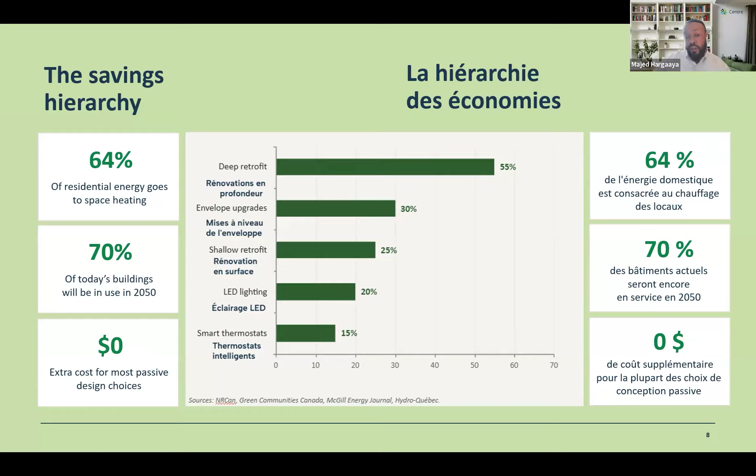And $0. Passive design choices, as I spoke of earlier, made at the design stage, the beginning. Strategies like orientation, shading, window placement, thermal mass considerations. These cost essentially nothing extra compared to building without them. The cost is in making them later or not at all. Next slide, please.

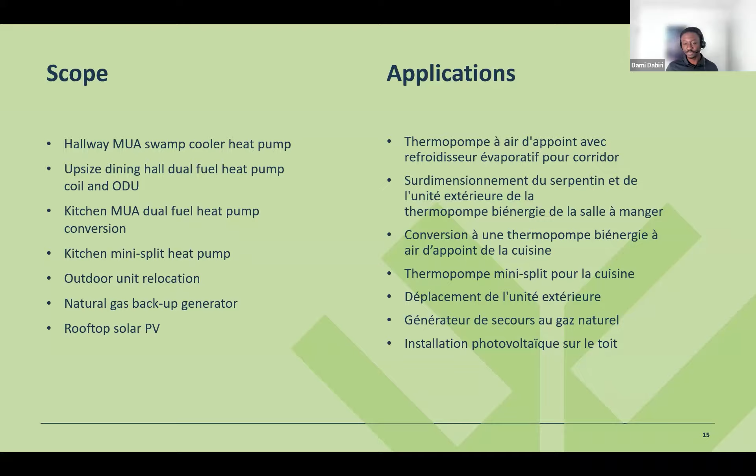And speaking about cost, there is a question in the chat about the typical cost of an energy audit and L2, the extended energy study that you mentioned. Yeah. So an L2 depends on the scope, but typically between $10,000 and $15,000. Again, if you want to go deeper on one system or on multiple systems, that number can change, but you can expect between 10 and 15. I've seen a lot of them come in at around $12,000.

Okay, so the project team, again, something I'll speak more about the importance of later. We have Melanie Cox, our contact at Salmo Valley Estates, who has been massively instrumental for this project, and I'll say more about that later on. We have NG Refrigeration, which is a mechanical contractor. EAS are doing the electrical work. Infinity Solar, as their name suggests, are the solar PV contractors.

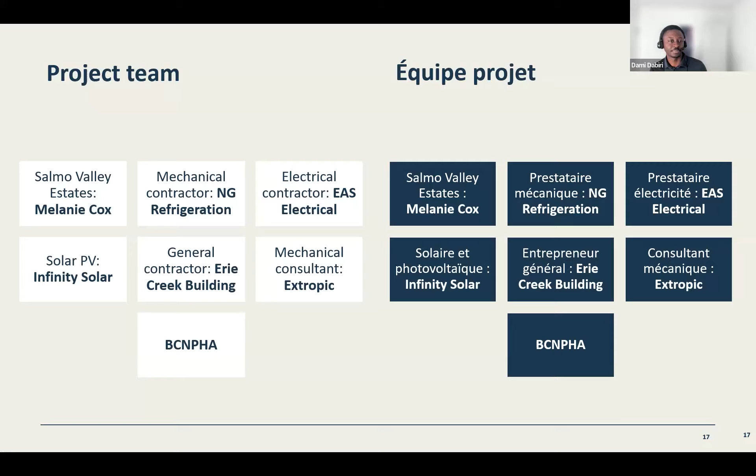If you can have someone that knows the building in that role, it's night and day, I would say. It's not always possible, but if you can, it's totally worth it. Thanks. Yeah.

So like I mentioned, construction started not too long ago in November of last year, and I would say we're about 80% through the scope. The outdoor units that were in the penthouse mechanical room have come outside, and the swamp cooler that was causing so much headache has been decommissioned. That will never leak and damage the building again. The kitchen mini split heat pump has been installed. We're still waiting for a few of the outdoor air units for the new heat pumps, and we're expecting those pretty shortly.

The permits and net metering for solar are complete. We've ordered that, and install is probably going to be completed by the end of May. And the generator has arrived; that's on the cement pad. We're waiting to attach the gas line for that, but that'll probably happen over the next couple of months. So we're looking at full completion probably by the start of the summer.

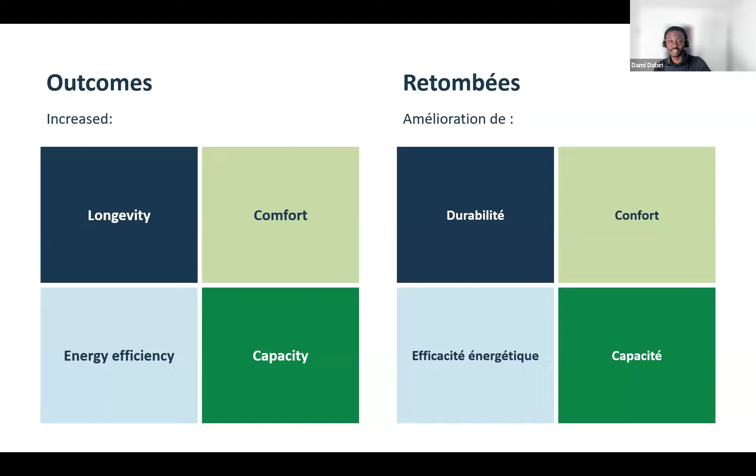Yeah, which we found here, if you have a unit that's performing poorly in terms of cooling or heating, it's very easy to say, oh, let's upsize the unit or get a different piece of equipment. But sometimes it's as simple as letting your outdoor air unit breathe. Yeah, so it's definitely something to consider, you're saying. 100%. Yeah. Okay.

Cool. Thanks for the questions, Majed. No problem. Everyone else, feel free to follow Majed's lead if you have a question. Yeah, there's a question in the chat.

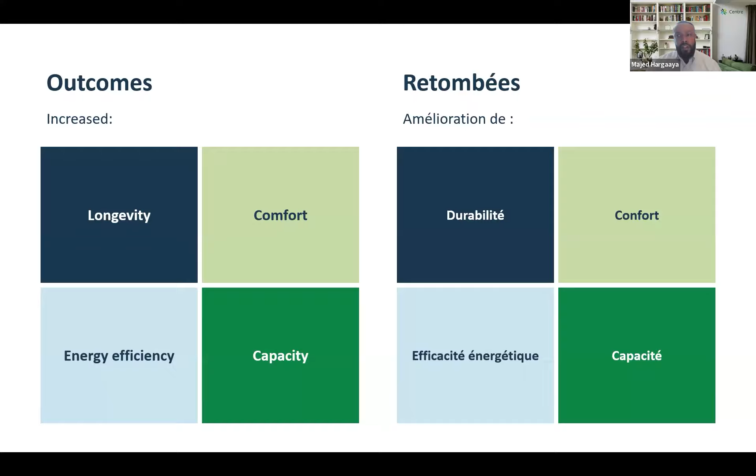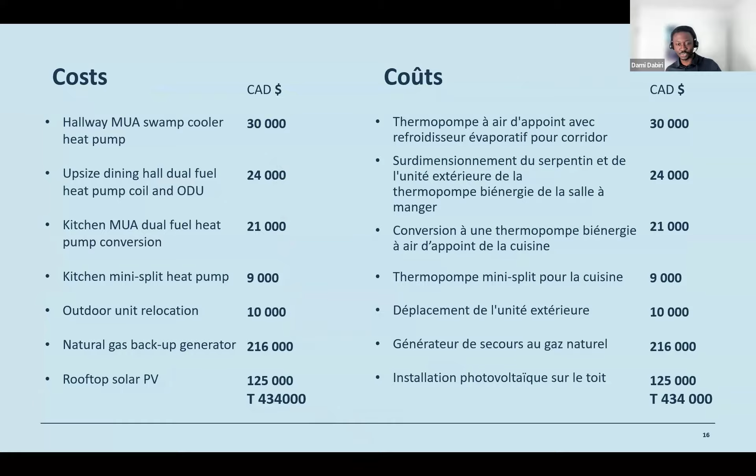And the last question was, what energy savings would be recovered per year? Yeah, that's a great question. If we can hold on to that question, that was actually the slide I was just about to get into. This one right here. So drilling into the energy efficiency outcomes a bit more, just to give you a sense of the extent of savings we're expecting and that you can expect from your projects.

For this, I'll spotlight mainly the three energy efficiency measures, because for some of the other measures we're upsizing the unit to deal with cooling issues or adding a heat pump to deal with cooling issues. In those cases, you won't see savings because you're increasing energy use. But for the addition of a dual fuel heat pump for the kitchen MUA and replacing the swamp cooler with a heat pump, you should expect to see savings.

This table here shows kind of the relative energy costs. I'm going to turn on my laser pointer again. Okay. It shows the relative energy cost and GHG savings for the three measures. If there's one plus sign, it's between 0 and 20% savings. Two plus signs is between 20 and 50% savings, and three plus signs is anything above 50% in savings.

A couple of key things to note. The solar PV measure doesn't technically save energy, which is why you see there's a dash here, because you're just shifting where that energy is coming from. It's not an efficiency measure.

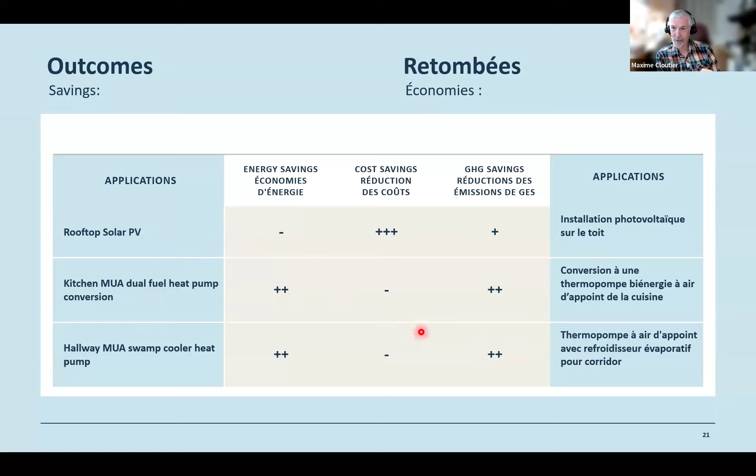I see that you've got a fairly big generator in your system. What does it feed actually? Does it feed the whole place or just some parts of it? Yeah, that's a great question. It's some parts of it. It's the common spaces, so like hallway lighting, hallway systems, the kitchen. Okay.

So what's your evaluation of how long your building is going to last? The life expectancy of your building. Yeah. So this building was built in 2014. So we're just over a decade into the life of the building. So yeah, this building is going to be here for a while yet. Would you call it 100 years or more? Yes, but you probably don't want to get to the 100-year mark without doing some significant work. I would say before you have to do anything major, structural walls will probably be at least 60 years. So maybe another 50 years from now.

I'm asking the question because the building I'm in is already 55 years old. So we all wonder whether we should aim for 100 years overall or even more, because the tendency today is to not demolish what can last. We're uncertain. Should we invest big money at the age the building is at now, about 60 years old? And should we expect a life expectancy of over 100 years? My feeling is that it could go to as long as 150 years if you're very careful. It's just a gut feeling. But again, it also depends on your specific building, like is the facade brick? When was it built? What are the bones like? The variables are many.

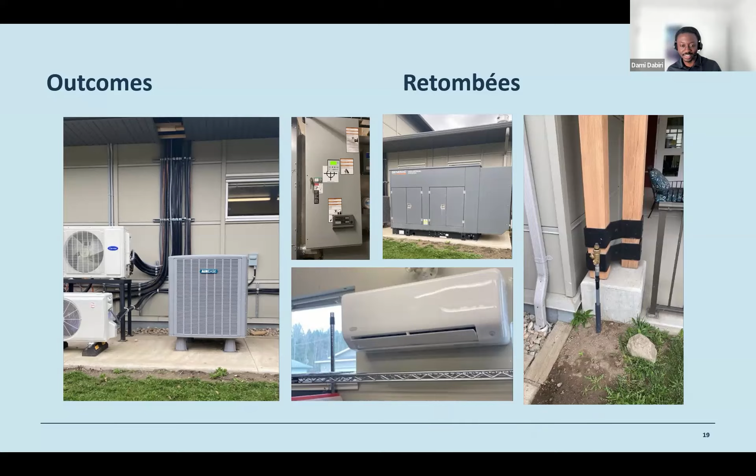Yeah. Thanks for those questions, by the way, Maxime. Does anyone else have questions about what I just said?

Yeah. I put a similar one in the chat box there. I know what we're doing and why we're doing it. I understand that, I'm not against it, but the problem is from a capital perspective, you have to go and ask for money based on the return. So I did a quick calculation there: in BC, buildings last for 25 years. Let's say equipment lasts for 15, 20 years, sometimes 20, 25 years.

So with a capital cost of $434,000 over 25 years, you have to save $1,400, ignoring upcharges and things, $1,400 a month in energy to prove to the powers that be that it makes sense to do that. That's what I was getting to with my previous question. $1,400 a month or a year? A month. With a capital cost of 434, divided by 25 is 17,000 a year, which is $1,400 a month to save to cover that capital cost.

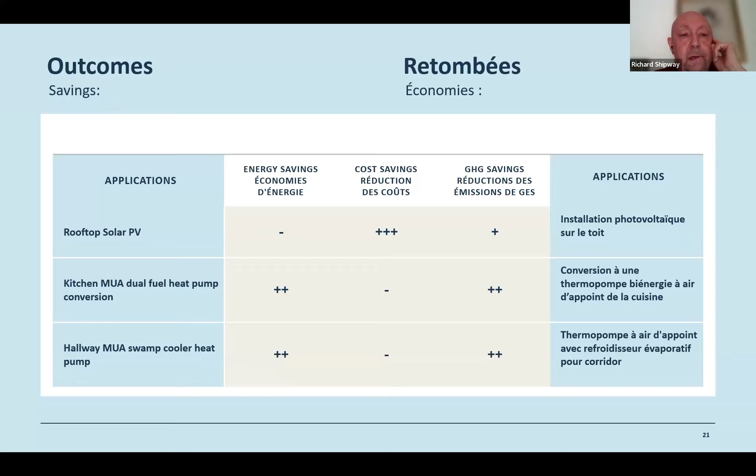So the problem that I have is when you go and look to get the capital cost covered, and BC Housing has less and less money nowadays, you have to show where that return is. And that's the challenge, right? So I think the important thing from my perspective is to have numbers to back up that we spent this, we saved this, going forwards. That's going to be really important because those are some of the questions I get asked when I try and look for cash to do this kind of work.

Sorry, I'm happy to speak to that, but for the math, if you're saving $1,400 a month, that's like $18,000 a year, which will mean you recover your project costs in 2 years. So was it a $40,000 cost or $430,000 cost? Oh, I thought you said 34,000. That's what I heard. The numbers you showed were $434,000, right? Yeah, one of the projects. I thought you were speaking specifically about the heat pump project.

One project you have is 434, so it's $1,400 a month that we have to show that we benefit from, right? So that's the argument I have to have with getting funding: if I don't save $1,400 a month, then the answer that often comes to me is, well, why bother doing it?

Yeah, correct. Just to make a clarification, that $434,000 is for the entire project package, so the rooftop solar, the heat pumps, everything. For the entire project package, there is a return on investment. You will get your money back because we're looking at an ROI of like 15% for the total. And I think I mentioned that that's mostly due to the rooftop solar. If you were to isolate these, then the equation, yeah, go ahead.

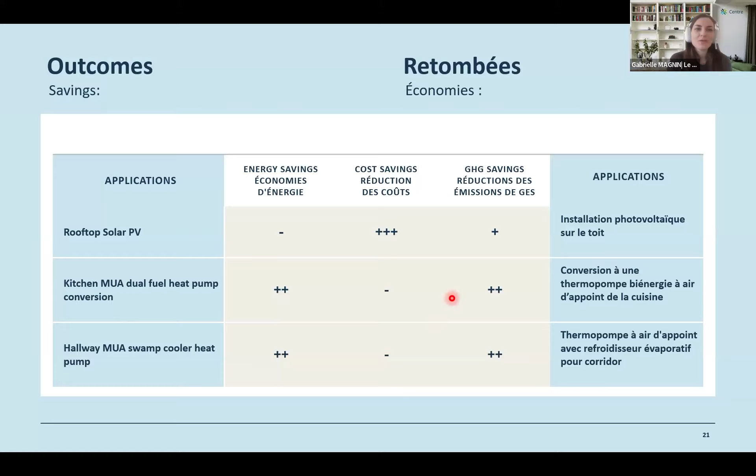Just as the timekeeper, I would suggest, thanks for all the questions, but maybe we can wrap the conversation first. So Dami, if you can talk about maybe the challenges and lessons. Yeah, thanks. And highlight also some challenges of this type of project. So that's a really interesting conversation. And then for the last few minutes, we'll talk about other questions. Sounds good. Yeah.

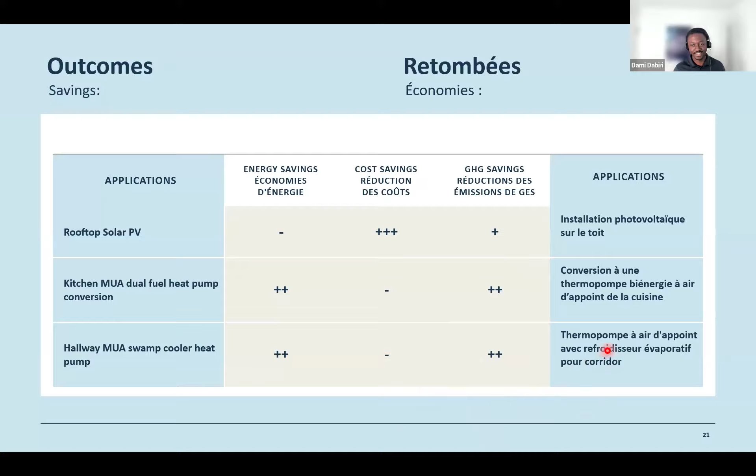Sounds good. Thanks. Okay. So for the considerations and constraints, what are some factors to consider if you're looking to do a similar project? There are a number of them, but I'll touch on some that I feel are really important. The roof structural capacity. We did a structural assessment of the roof early on to understand if the solar installation was a good idea and it matched our structural capacity. And lucky for us, the roof had the needed capacity, but it's not always the case, especially if the building is older. So definitely check this early.

And even if you're not quite ready to do a solar PV installation, that's fine. Still do that ahead of time so you have that information when you're actually ready to install your solar PV system. In our case, the solar contractor did the structural assessment, but it doesn't have to be them. You can engage with a structural engineer to do that.

Another roof-related structural issue that we ran into was upgrading the roof anchors. And thanks to the window cleaning folks that were there earlier on, they identified that the anchors were not adequate for folks to work on the roof from. And it was fairly straightforward to do, but again, also a consideration that we had to make.

For electrical upgrades, thankfully, we didn't need any capacity or service upgrades, but we did have to spend a bit of time figuring out how to tie these different systems being installed together. And it required tight coordination. It's something I'll talk a bit more about in the next slide, but again, just something to be conscious of.

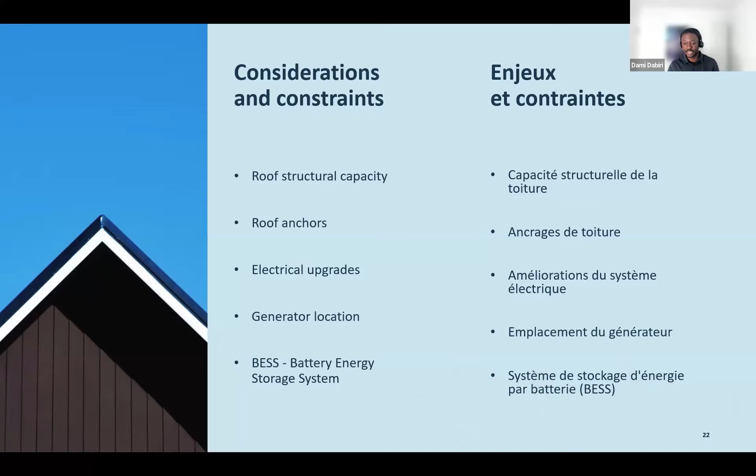Just pausing for effect and for questions, but I'll move along. The challenges and the lessons. Again, I'll highlight a few of these. Multi-measure projects. So much of what was learned is directly related to the multi-measure nature of this project. They are harder, more complicated, but totally worth it.

Why exactly is it worth it? For one, you often don't have a choice. I mentioned in this case that we had funding for the solar and the generator, and so we did it. And so that was an opportunity for us to take advantage of that funding in our case.

But another reason is efficiency. Similar to how it would be a bit ridiculous to go to the grocery store 3 different times to get 3 different items, it's the same here. We're able to bundle all the measures at once, which meant that, for example, the electrician came in once, did all that work, and then the synergy between the measures as well was better than if we were doing those serially.

So multi-measure projects are more complex. How do you navigate that? The one phrase I have here is integrated project design. And the gist of that is essentially to get everyone together early.